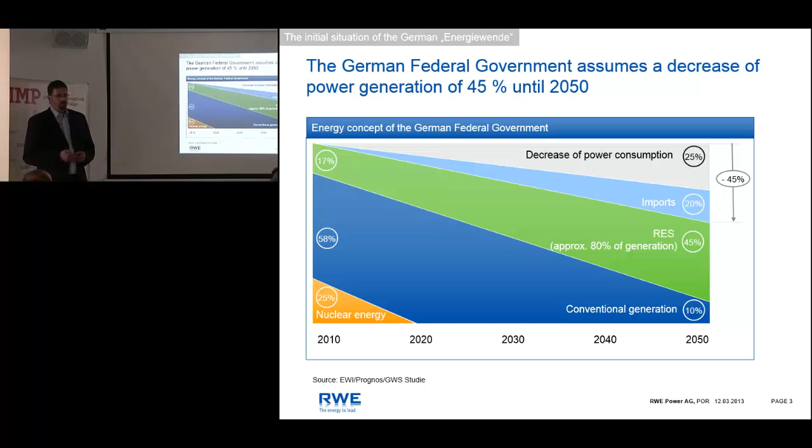Why did that happen? Because I just saw that in Spain the largest deployment of photovoltaic happened in 2008, and after that, not anymore. So obviously something has been different in Germany. And the difference is the feed-in tariff that you get if you install a PV on your roof is lowered every year. And in the year you have the first installation, you have a guarantee to get for 20 years a certain value per kilowatt hour, and that is lowered every year. So what happened is that the panel prices ramped down quicker than the subsidies, and that's the reason why in these years these large amounts of photovoltaic were installed. So it's mainly subsidy driven.

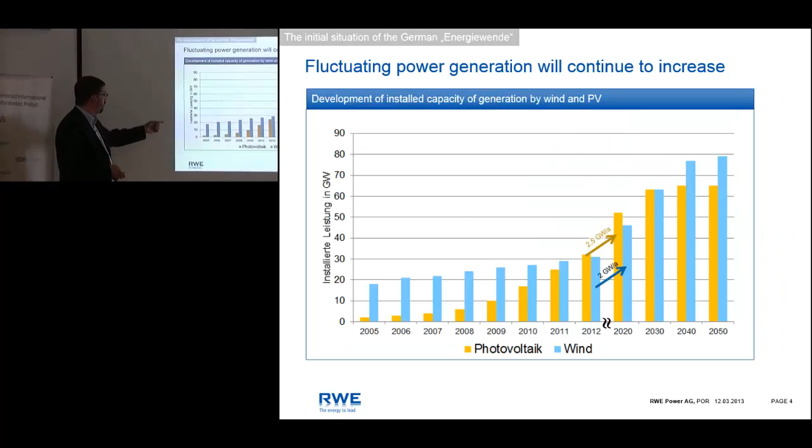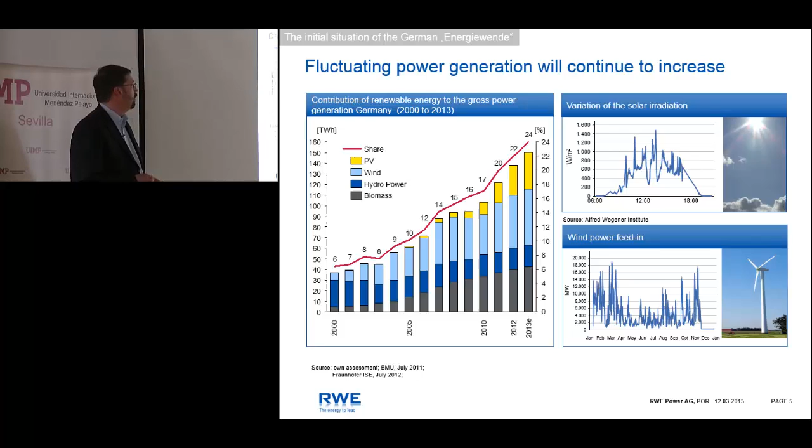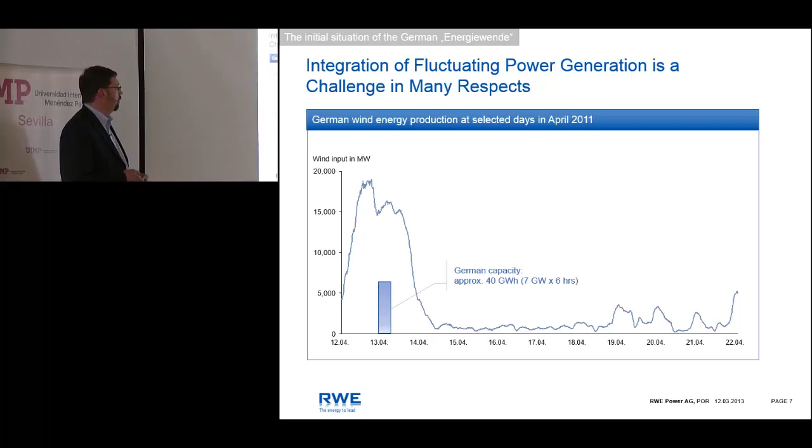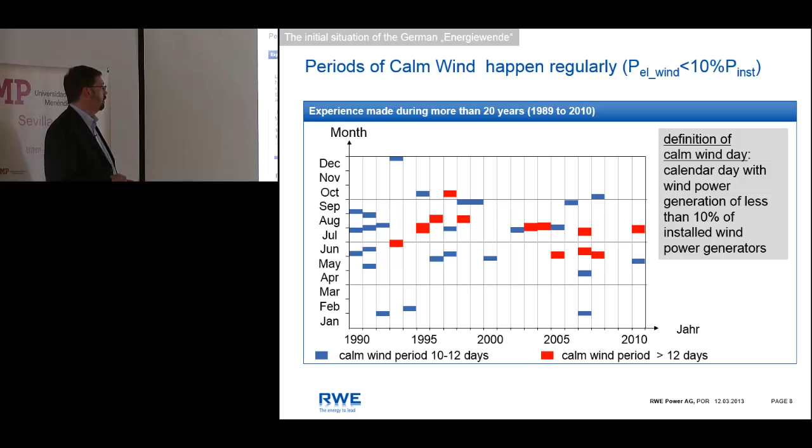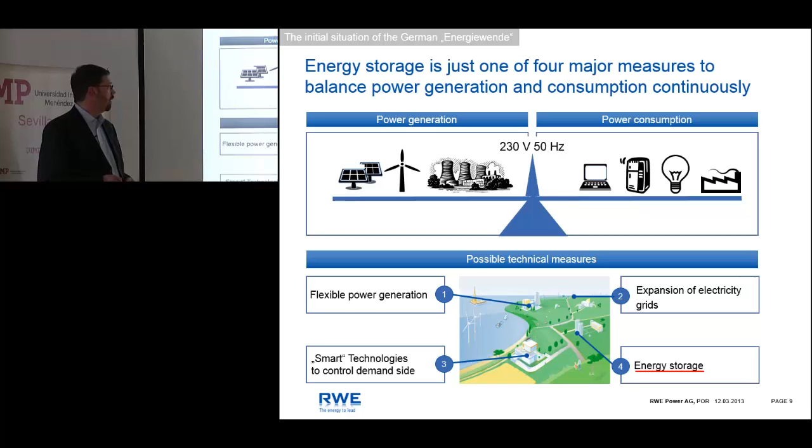The third measure you can do in order to balance out demand and supply will be smart technologies on the demand side. And of course, energy storage is one measure, but none of these measures have the capabilities to solve all the problems that we face in the future. I would like now to come to the topic of energy storage and to get a little bit deeper into the different technologies. Our focus was, of course, on the large storage technologies, and afterwards go a little bit more into detail in the ADELE project, the project I was coordinating for the last 7 years.

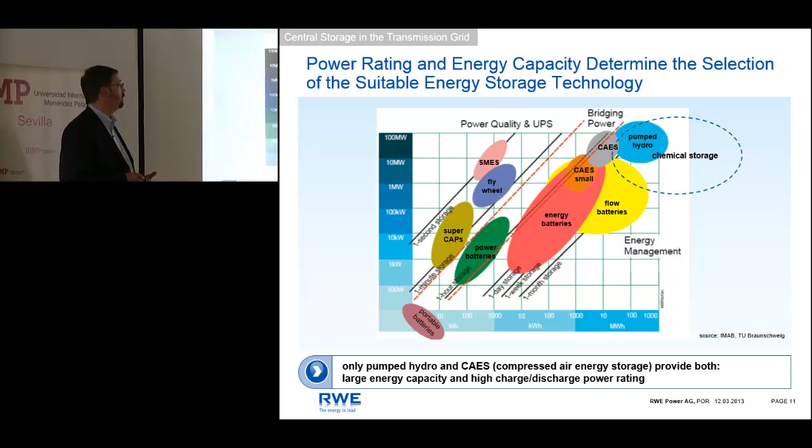Only pumped hydro and CAES provide both at the moment, large capacity and power rating. So if we look at these two technologies, pumped hydro is at the moment the one that has the highest deployment in the world. It provides excellent efficiencies of up to 70%, and from the technical properties is very, very good because of the fast reaction, fast response time.

They can ramp up very, very quickly, and the problem with this technology, especially in densely populated Central Europe like Germany, or also in the countries around, is that it's very hard to find sites for new installations. Theoretically, the potential is huge, but you also have to have public acceptance if you build a large lake or large lakes, and there's always a big impact on the landscape affected by that. So it is problematic to build that.

We were just involved in one pumped hydro power plant project, and the time from idea to installation is more than 10 years. So compressed air energy storage has a far lower impact on the environment, on the landscape. Only the machine building, as you see it here, is visible. And the good thing is you can also build them in those areas where we expect these large wind energy installations in the coming years.

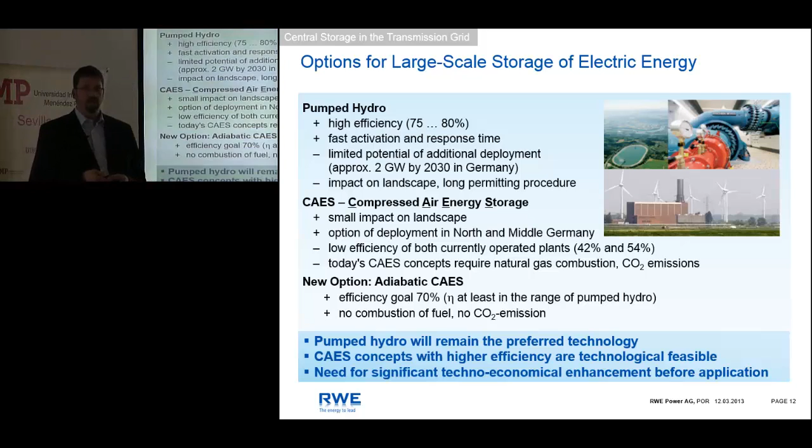So how does compressed air energy storage work? Basically you draw electricity from the grid, you drive a motor, and the motor drives a compressor train. The compressor takes ambient air, compresses it to a certain pressure, and the compressed air is then led into a subsurface volume in the ground. During this compression, the air is heated up, and since you need to feed this air into the ground cold, you need to reject the heat to the ambient. So this heat is lost, and that's the main driver for the efficiency loss there.

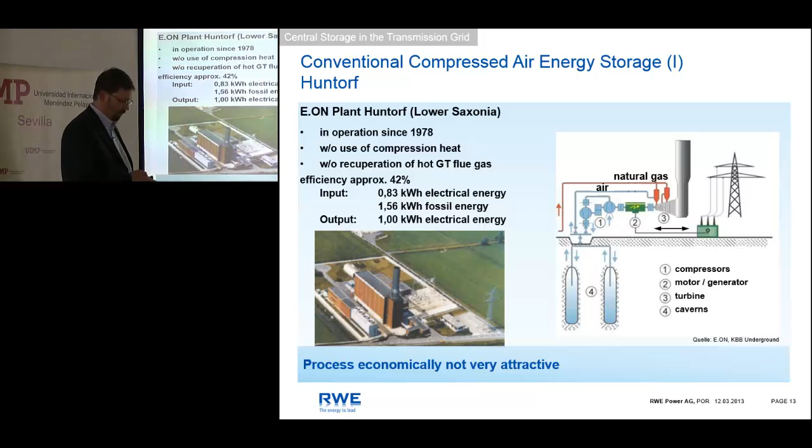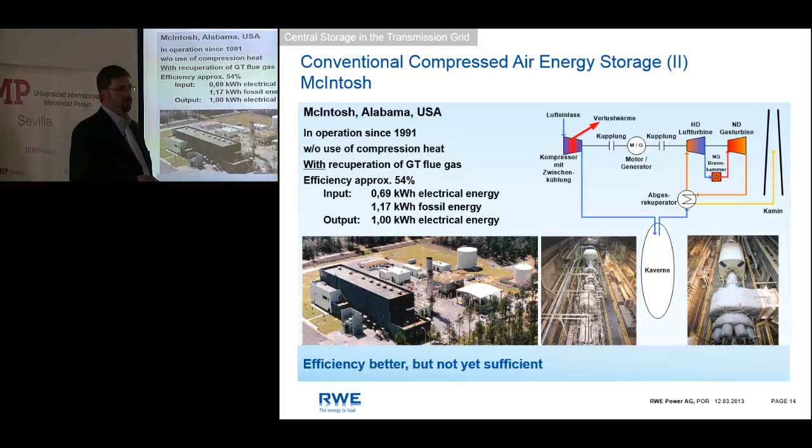So when you discharge, you let the air out of the caverns, feed it into the combustion chamber of a gas turbine, and then produce electricity again. The second plant in the US, built in the 90s, has one enhancement. It makes use of the flue gas temperature, and in an exhaust recuperator, the cold cavern air is heated up before it's applied to the turbine. So that's the main difference here, and that boosts efficiency up to 54%, which is good, but still far away from the 80% of pumped hydro storage.

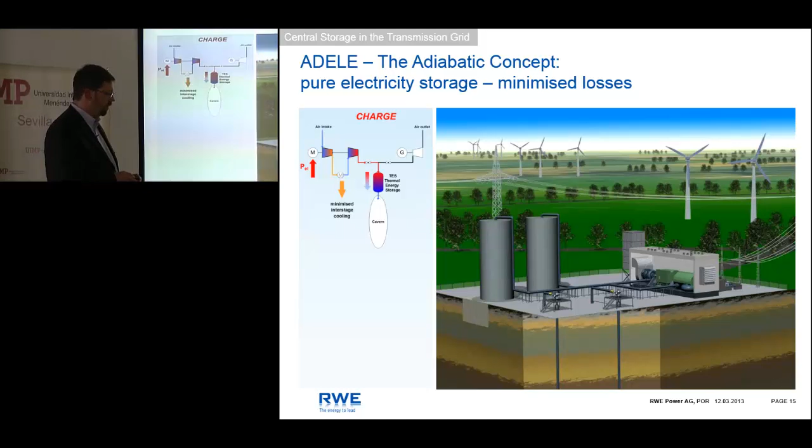So I'd like to explain now what we tried to develop in the last 7 years. The process of the ADELE concept, which is an adiabatic concept, is quite similar but different in one important way. If you charge, you also take electricity from the grid. You drive a motor that drives a compressor. You draw ambient air, and the ambient air is compressed here and heated up. What we now do is we do not reject the heat to the ambient. We keep the heat in the air and apply this hot compressed air to a so-called thermal energy storage. It's a heat storage in order to keep that heat for later use during turbine operation when we want to discharge.

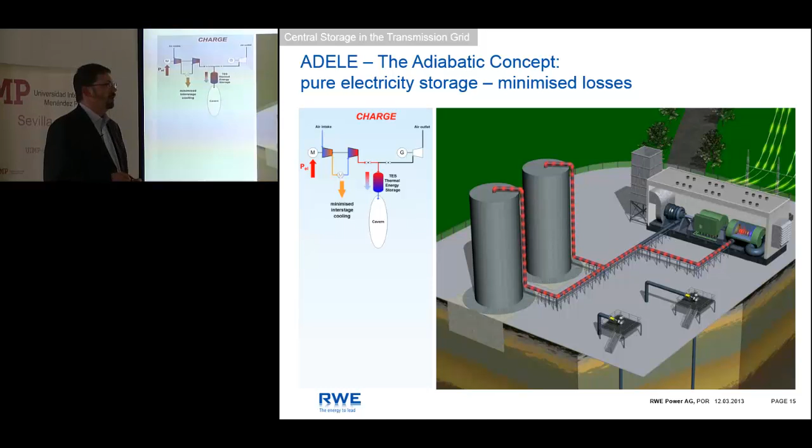So what does this heat storage look like? We designed it as a huge pressure vessel, and inside the pressure vessel is a solid material, and the hot air gets in direct contact with the solid material and transfers its heat to this material. It can either be ceramic bricks or spheres as a pebble bed, or it can also be natural stone.

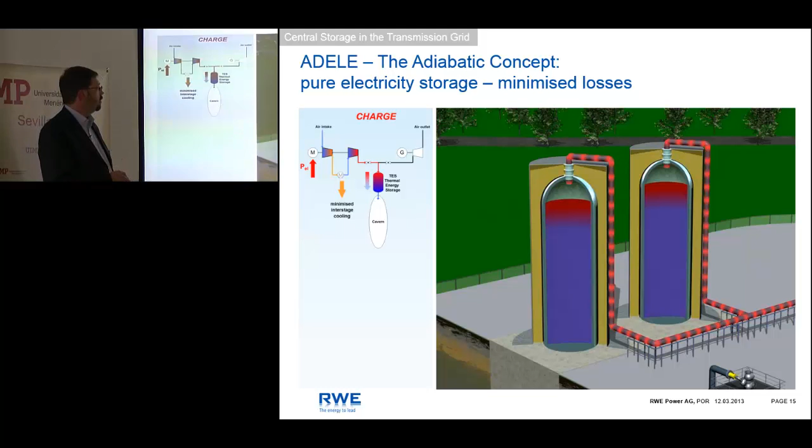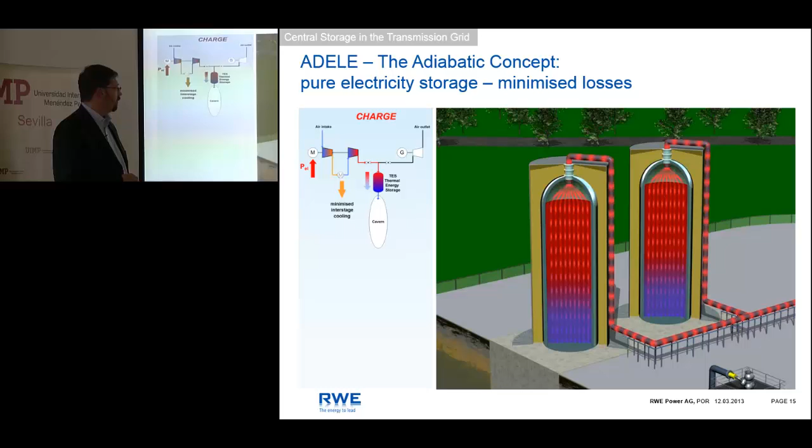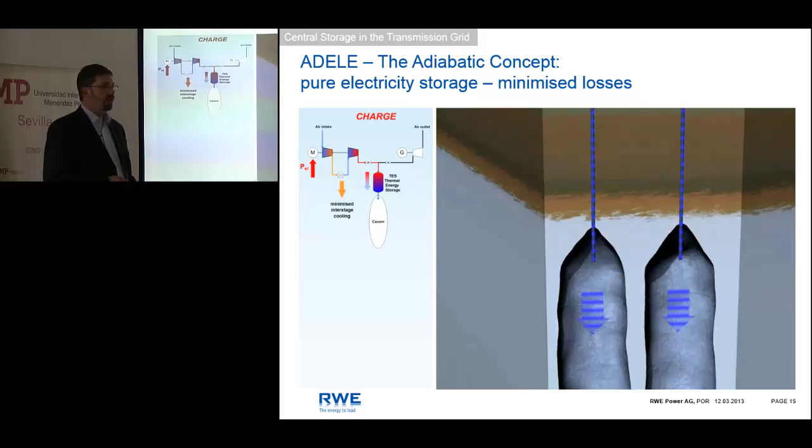So in this case, the storage is cool, and when you now let the hot air flow through the thermal energy storage, that heat front is pushed to the bottom. And if you do that long enough, the heat storage will be filled. And the cooled air is then being led via piping through a wellhead, where it is afterwards being stored in a subsurface cavern.

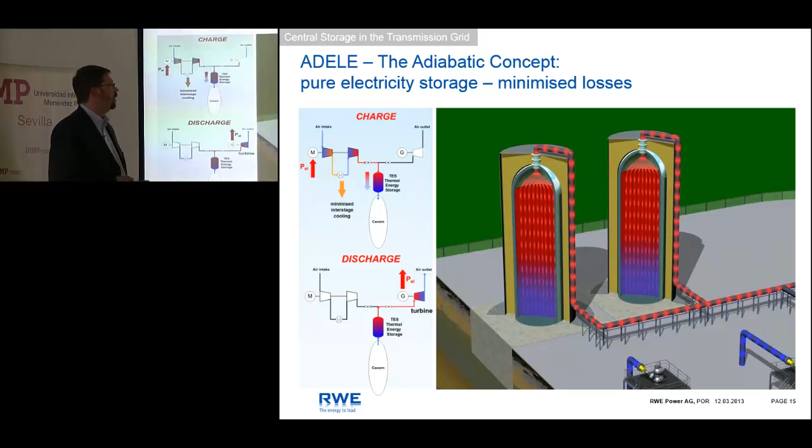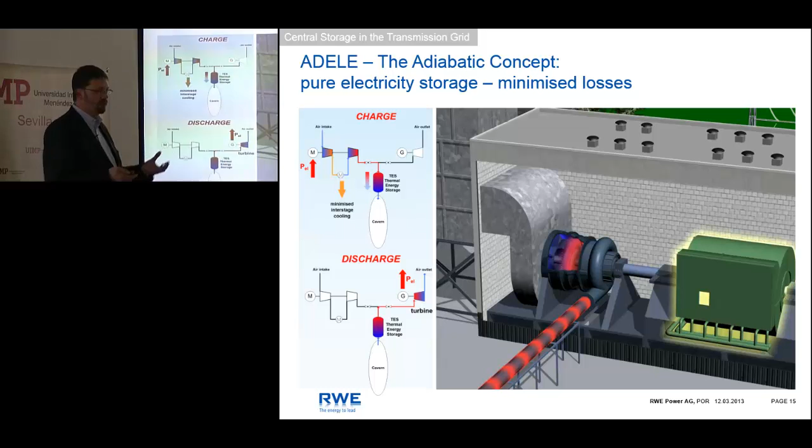If you now want to discharge, you just reverse the process. You release the air from the cavern, let it flow in the opposite direction through the thermal energy storage. The air is heated up, and the pressurized hot air is then being fed to a turbine where it's expanded and produces electricity. But there's no combustion needed anymore. There's no fuel needed. Just the hot pressurized air is expanded and produces electricity. So that's the main difference in this concept.

So what did we do? We started 2008, first with a feasibility study jointly with General Electric in order to figure out whether they can provide such turbomachinery equipment. And after a successful feasibility study, we initiated a research and development program to address all the technical questions we have. Here some data is given concerning the power and the capacity. We intended to have 260 megawatts of turbine operation power and a storage capacity of 4 hours, which leads to roughly 1 gigawatt hour of storage capacity.

We had the technology partners on board here that you need, which is ESK. It's a company of RWE that designs such caverns in the ground. General Electric, I just mentioned, concerning the turbomachinery. And the DLR, the German Aerospace Center. They have very much knowledge concerning these heat storage materials. And Züblin is a construction company which designed this thermal energy storage.

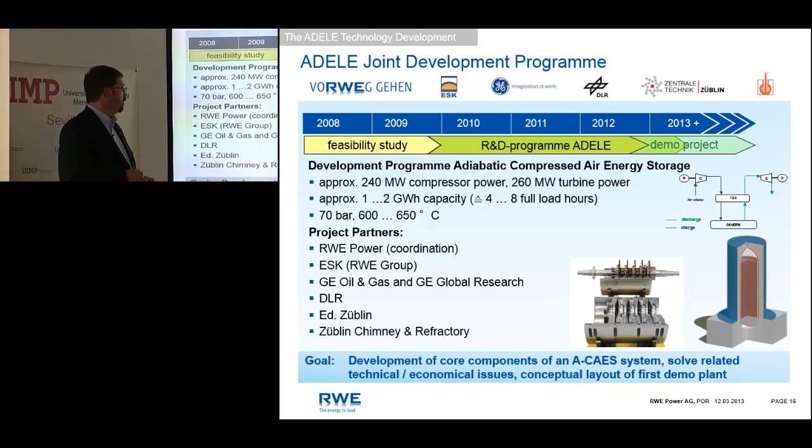So what topics do you need to address when it's a completely new technology? A lot of questions arise, and were addressed during this R&D program. General Electric, first of all, had in their scope the modeling of the overall process and some optimization measures in order not only to design steady state operation, but also ramping up and ramping down, because we want to have a fast reacting plant.

On the compressor train and on the turbine, a lot of detail engineering had to be done, because this compressor train does not consist of one machine. There are several machines after another, either 2 or 3. First, an axial compressor, which is available, and then followed by 1 or 2 radial compressors. These radial compressors are normally not operated at these high temperatures, so many detailed design aspects were addressed. For example, if you heat up and cool down this machine, you have extension of the material and shrinking, and these clearances have to be carefully looked at.

Also, the lube oil system mustn't exceed 80 degrees C. This is quite difficult if at the last stage here you have 600 or 650 degrees C. So there was a lot of detail engineering to be done in order to figure out whether these machines can be built.

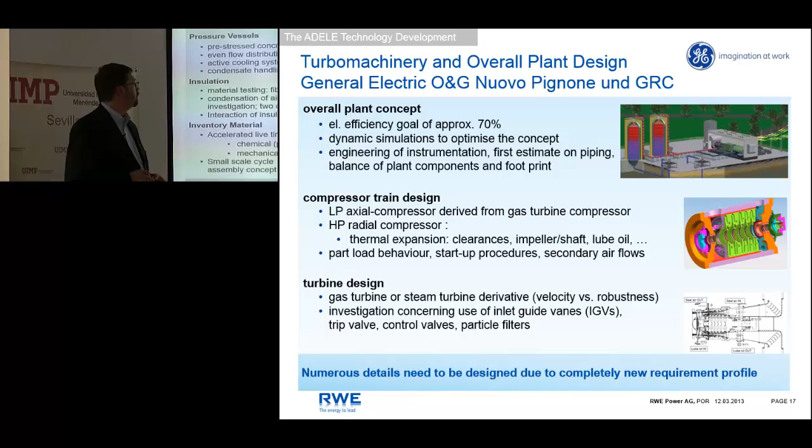So the technology we had to design at the thermal energy storage is mainly categorized in three blocks. It's the pressure vessel itself that was designed by Züblin, but Züblin designed not a metal-based pressure vessel, because normally you would do a pressure vessel from metal, right? And since we need a huge volume, the wall thicknesses of this pressure vessel would be too big. This material is not available on the market, and it's not affordable either. So Züblin, as a construction company, designed a pressure vessel based on a pre-stressed concrete design, and this was what they did in the program.

Furthermore, the insulation needs to be very highly sophisticated, because the concrete mustn't see the temperature, because if the concrete gets above 80, 90 degrees, it loses its stability and does not carry the pressure anymore. So we needed a good insulation there.

And last but not least, of course, the inventory material. What we did is, with the inventory material and with the insulation, we took hundreds of different materials and samples and cycled them in ovens and analyzed them, whether there was a change in the material or not, in order to figure out which is suitable or not.

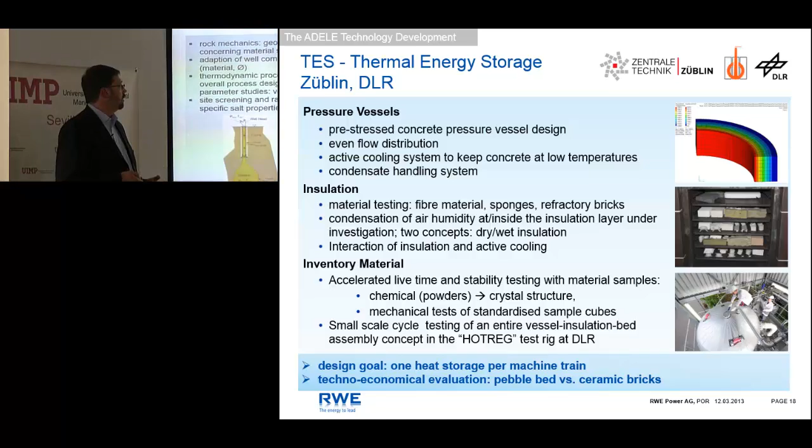Concerning the cavern technology, as I said, you need a volumetric storage in the ground, and our company partner ESK was the relevant one to investigate the open questions there. Cavern storage is a well-known technology in natural gas storage, and basically it works as follows.

These storages here are huge. They can be 300, 400 meters high. The Eiffel Tower fits in there. Imagine that. Those are really huge cavities.

So what ESK did is we needed to analyze material selection, because since we have oxygen present, water, humid air, and salt, this is a very corrosive atmosphere. With natural gas storages, this is not the case, because there's no oxygen present. So we had to carefully select the material. We did long-term testing there, accelerated lifetime testing with these materials that we selected.

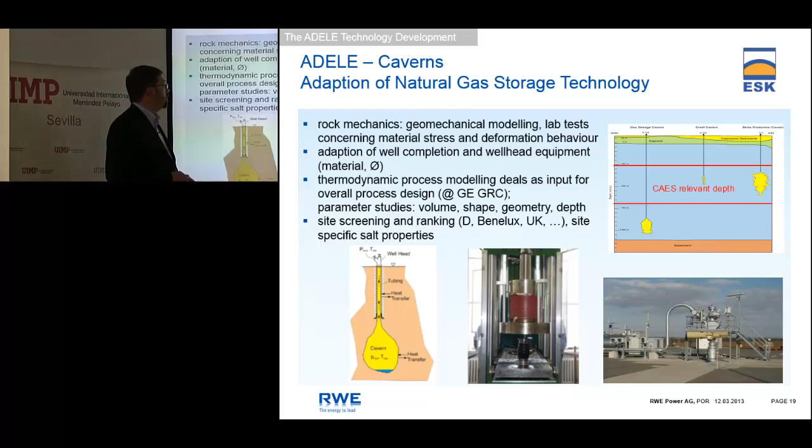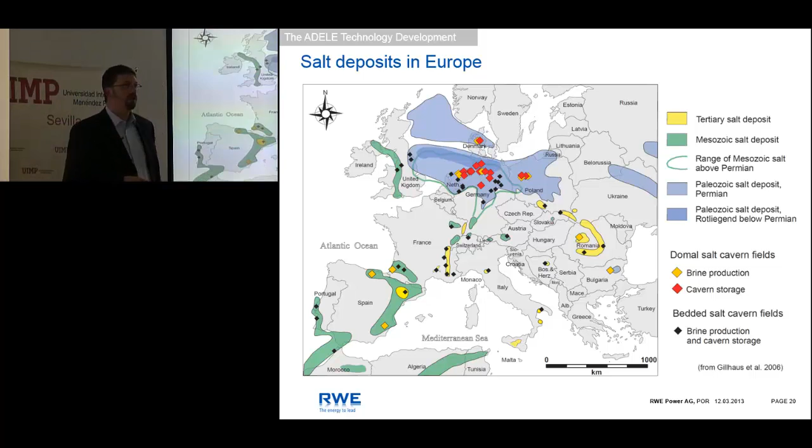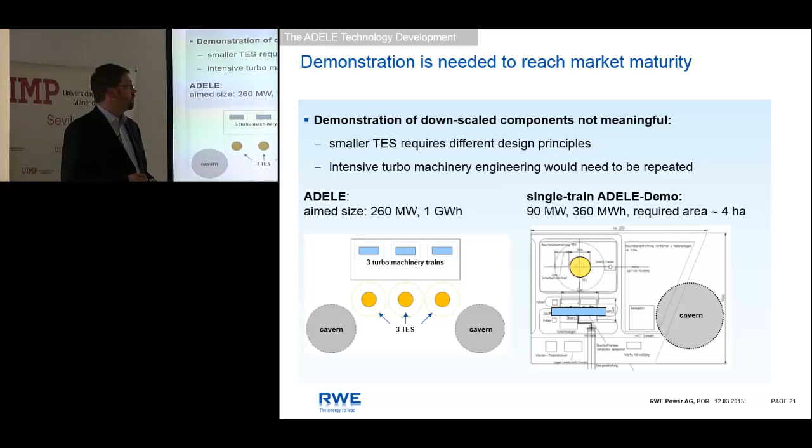Okay, we figured out that we would build this 260 megawatts not in one single train, but in 3 parallel trains. So what would follow now is a demonstration project, and we would of course only build one single train for a demonstration plant. What we also figured out is that unfortunately the costs are very, very high, in the range of 2,500 euros per kilowatt. So we intended to bring the costs down.

So I just talked about the ADELE project, the development project. What followed was the ADELE-ING project, which is the engineering for a first demonstration plant. That was the objective. And at the end, a final investment decision should be possible.

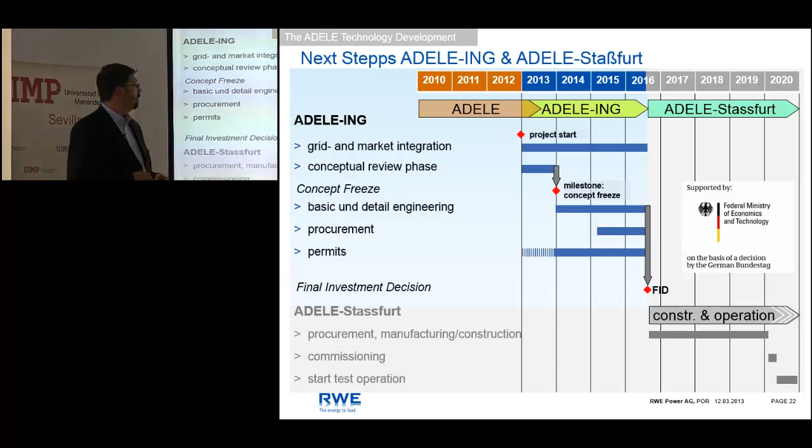And as I just said, we figured out in the ADELE project that the costs were too high. During the program, we had a lot of ideas how to make it cheaper, but we didn't have the time and the money and the resources to investigate all of the different paths that we had there. And that's why we put one phase at the beginning, the conceptual review phase. And that's what I'd like to address now.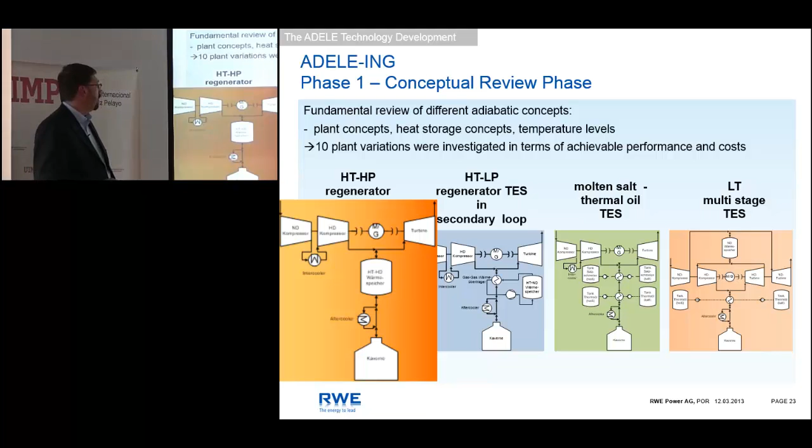And a second idea was to put this thermal energy storage in a secondary loop. Why did we want to do that? Because in a secondary loop, you would not need these high pressures anymore. You would transfer the heat in a heat exchanger to a secondary loop, and this secondary loop can be operated at far lower pressures. That would make this pressure vessel far cheaper.

The third concept would be a molten salt thermal oil concept. So the hot air is fed to a heat exchanger. It transfers a certain amount of the heat to a molten salt system, let's say from 600 to 300 degrees, and then from 300 to 50 degrees to a thermal oil system.

Well, the decision to go for such a regenerative storage that I explained at the beginning was made many years ago, and the development on the concentrating solar power plants, which use these molten salt and thermal oil, had gained experience, and we wanted to check whether this is probably now, today, the way to go.

And the fourth system is a so-called multi-stage system where we go a different way. The first compressor compresses the air maybe up to 15 bar and 300 degree. We take out the heat here in the first thermal energy storage. Then it's further compressed again to, let's say, 300 degree, and then we have a molten salt system that stores the heat in a second step. So multi-stage concept. And the main driver was bring costs down.

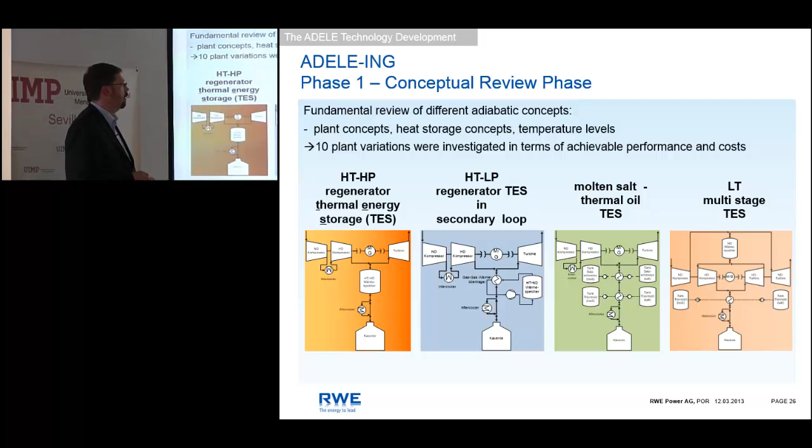Here is a picture which may display to you that bringing down the pressure for such a thermal energy storage is a good idea. On the upper left side, you see the cross-section of such a thermal pre-stressed concrete design at 65 bar and at 15 bar. And it's easily visible that it's far simpler, you need less material, you need less of these pre-stressing vanes and so forth. So that can be far more cheaply built.

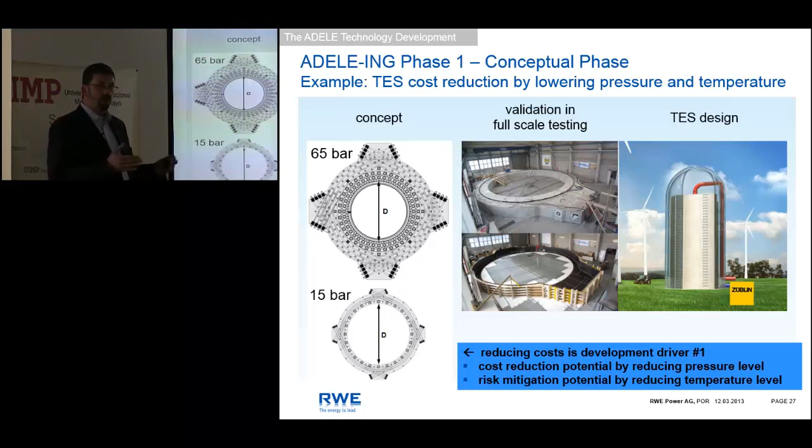This outer ring here is the one that is the pressure vessel, and with this construction on the inside and these black pillows here, we can pressurize this outer ring and make tests with that. Here you can see a picture during the construction of that. It's quite big and quite interesting, really.

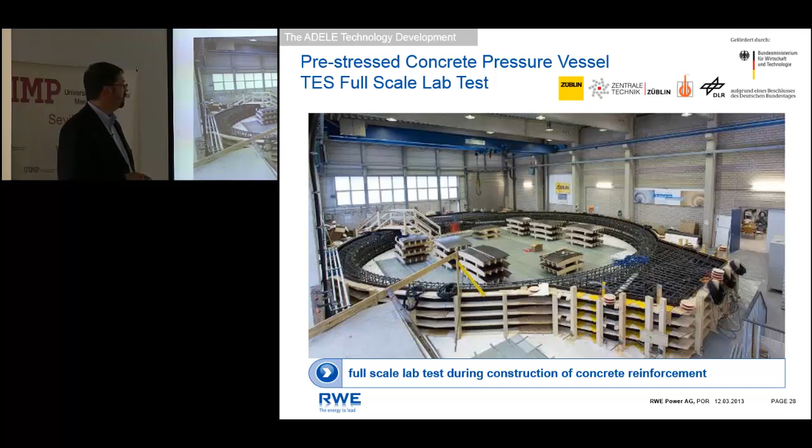So, finally, what was the winner of our investigation? Well, the winner of the investigation was, and that was a surprise, 3 systems operated really similar, economically wise. One is the molten salt thermal oil system, and the other one is the multi-stage system, which also contains one of these thermal energy storages, as I just described to you on the picture before.

So we ended up more or less at prices of 1,300 euros per kilowatt installation costs, and efficiencies of 66 to 68%. That's what our estimation is at the moment. And that's the result of this first year of investigation. So this was the technical part of that.

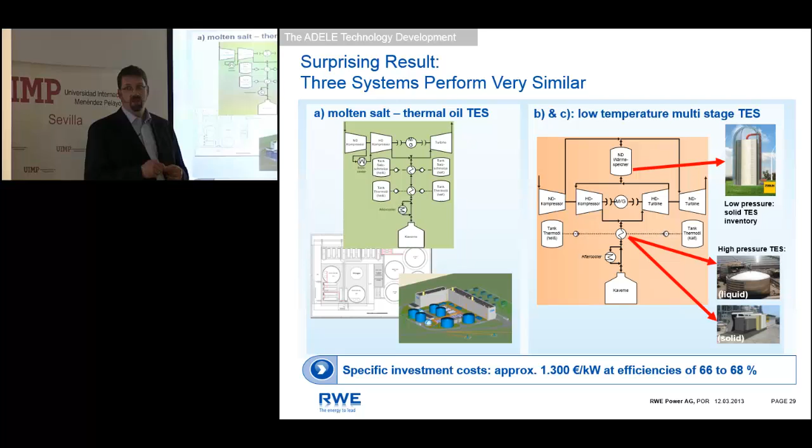We as developers can do everything to bring costs down, to adapt technical properties, to realize fast ramping up and ramping down capabilities. But the other side is the revenue side. If you want to install and build something, you want to get the money for your investment back. And this situation has decreased, obviously, in the last years, very dramatically in Germany. And that's what I would like to address now.

On the first view, you would not expect that photovoltaics would bring not the cost, but the revenues for storage down, but this is definitely the case, and let me explain why. In order to do so, we need to get a little bit into the market pricing mechanism. How does that work? What you see here is the so-called merit order.

At any time, any hour of a day, the market players give bids into the market and offer their electricity. The demand varies between a maximum and a minimum demand. In Germany, this is about 80 and 40 gigawatts. And in this merit order, the power plants are listed by their marginal costs, the cheapest first, then the next, and the most expensive at the very last. And the costs are only the variable cost, the marginal cost.

So the nuclear power plants have the lowest marginal costs. Then lignite; they are mainly listed in the order of the price of the fuel they need. Natural gas is the most expensive fuel, and therefore those plants are normally used as peak power plants. So what happens now? If you want to have more renewable energy sources, the renewable energy sources in Germany gain priority. The grid operators collect them and bring them on the market without any bid price, so at €0 more or less.

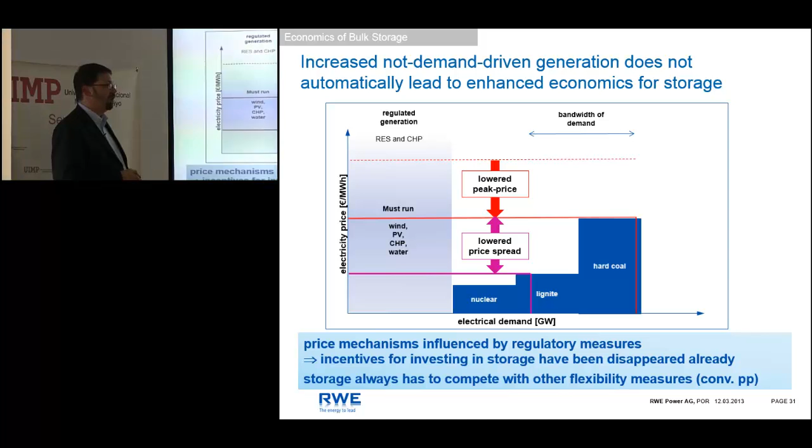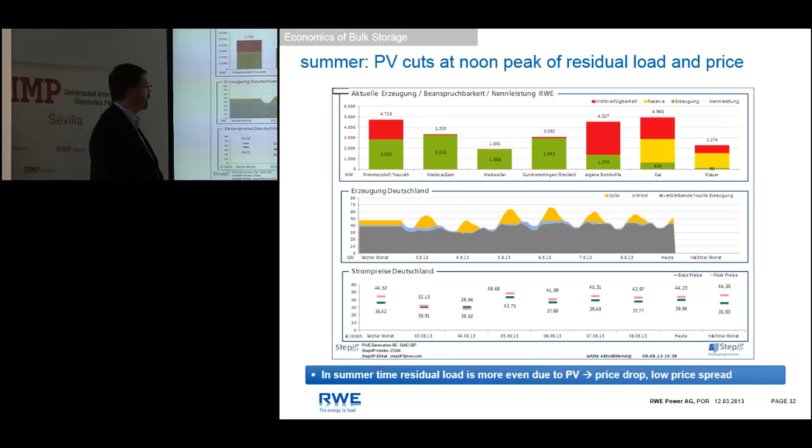And this has been evened out in the last years. So the level is nearly stable. And also the price, because the price directly corresponds with the demand, as we have seen before. So the pricing mechanism has led to the situation that the storage economics have been getting worse in the last years. And here you see that the price spread is only a few euros per megawatt hour. In former times it has been 20, 30, 40 euros, the price spread between day and night. And that has been leveled out. Sometimes, as here, the peak price is even lower than the base price, so very strange, but that's reality.

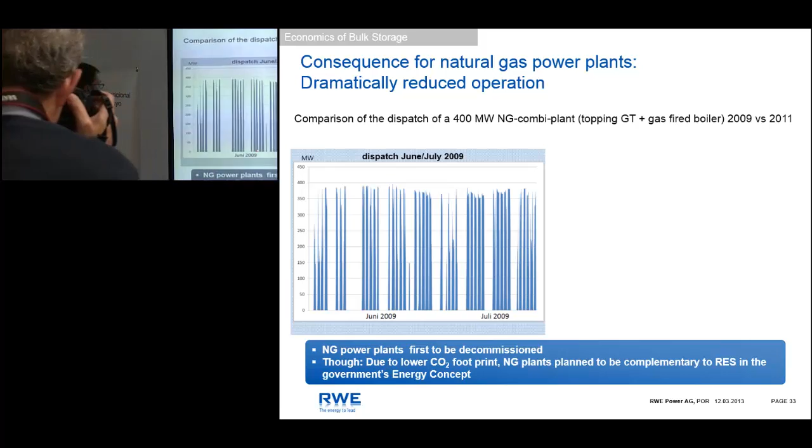And this is just to display to you that this is reality for us as a power plant operator. This is the normal operation of a natural gas plant, a peaker, which operates during daytime. And you see here the usual operation in 2009. Every day it is operated, every night it's shut off, and during the weekends it's normally also shut off. And 2 years later, the dispatch of this power plant looked like that. As a power plant operator, you can do that probably 1 or 2 years, and then you will close that plant because it doesn't earn any money anymore. And that's exactly what happens in Central Europe now.

And we have been closing a brand new combined cycle power plant in the Netherlands with 3 GT26 gas turbines, 60% efficiency. We close it down because it's not operated. And so far, this is also the problem at the moment for energy storage operating on the markets. And we will see what happens in the future. At the moment, we decided not to go the further step into the investment. With these circumstances, you cannot convince a board to spend 200 million euros on such a demonstration plant.

But what you also have to keep in mind is if you develop such new technologies, you need, as you saw, 10, 12, 15 years to get the first plant online and gain experience. But the reality here is far quicker. With PV installation, you have 25 gigawatts installed in 3 years, no problem.

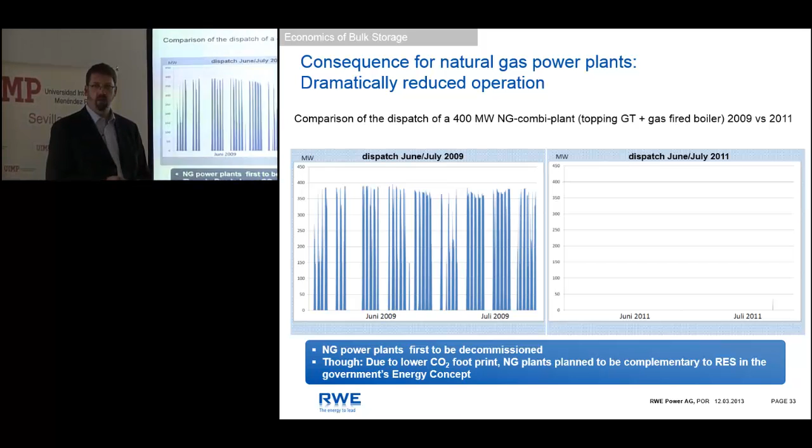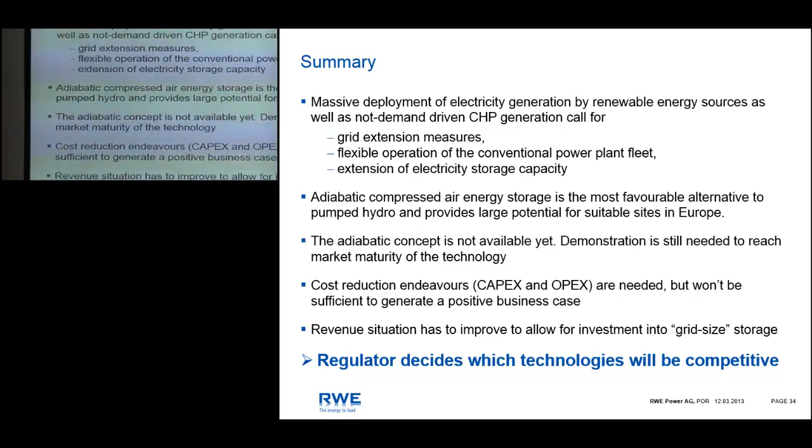Okay, so I'd like to summarize what I said. The renewables and also the combined heat and power generation, which is also on the task list in order to reduce our CO2 footprint, call for grid extension measures, but they alone will not be sufficient. We need flexible power operation and maybe storage if the market design allows for that. You always have options, and the technologies will only win if there is an environment where they can re-earn the investment, which is obviously the case for photovoltaics at the moment.

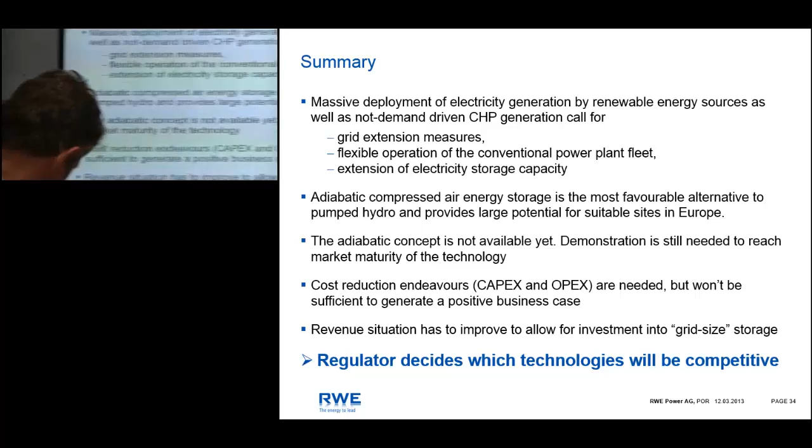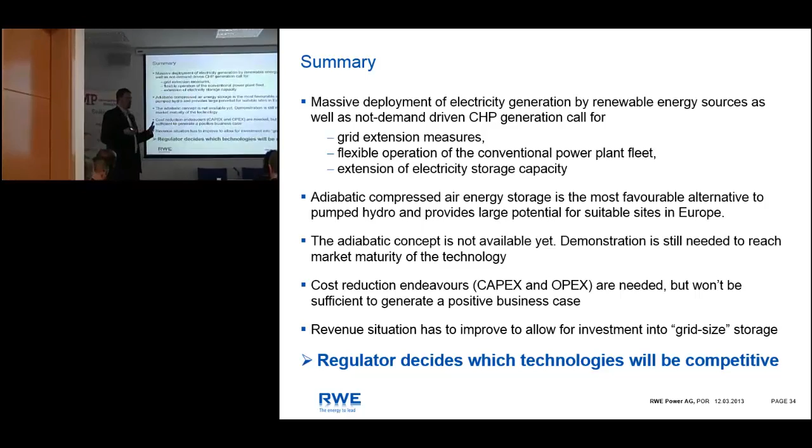And adiabatic compressed air storage is, from our perspective, after pumped hydro, the first choice. Pumped hydro storages will stay the best and the most economic ones if you have the opportunity to build them. It's still not available. We need a demonstration before we could speak of market maturity. With the cost reduction endeavors, we did our best. We are now in the range of the investment cost of pumped hydro storages. But there is no big further potential to bring the costs down.

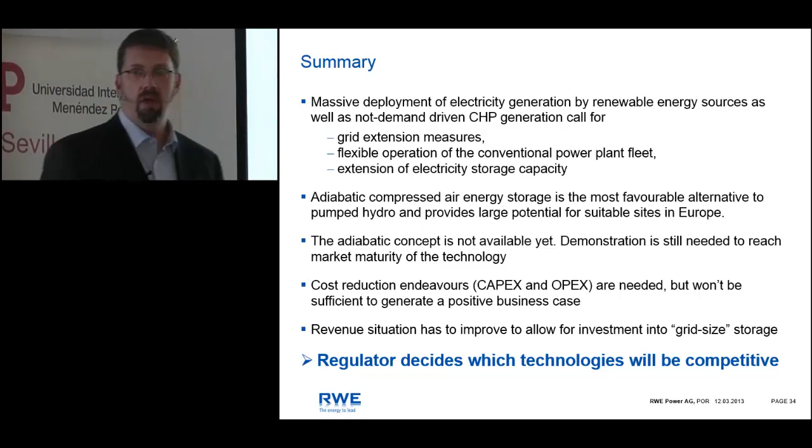So the revenue side also needs to be enhanced in order to allow storages to operate and to be built. And finally, the regulator will decide how the market mechanisms will be, and this will then decide which technologies will survive and emerge.

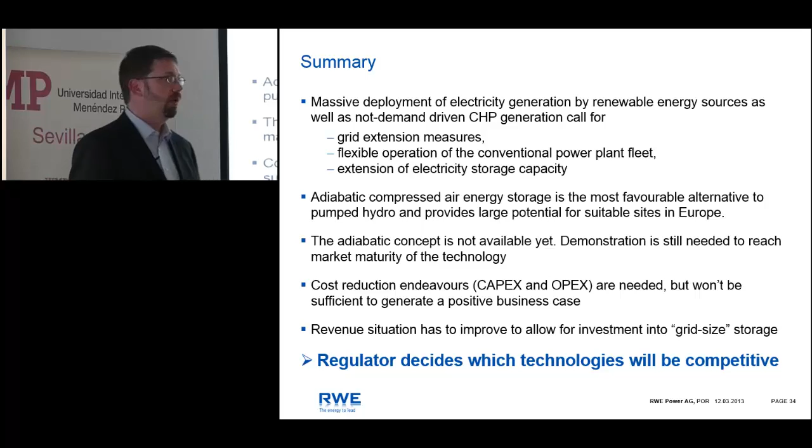So I'm at the end of my presentation. I would be happy if we could discuss this a little bit more, and I'm open for questions.